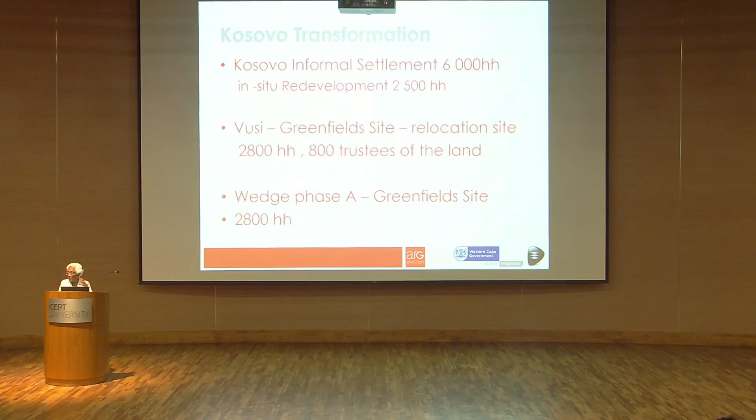Cape Town is at the bottom of Africa, and it's a peninsula into the ocean. We have the Indian Ocean currents coming on the one side and the Atlantic Ocean currents on the other side.

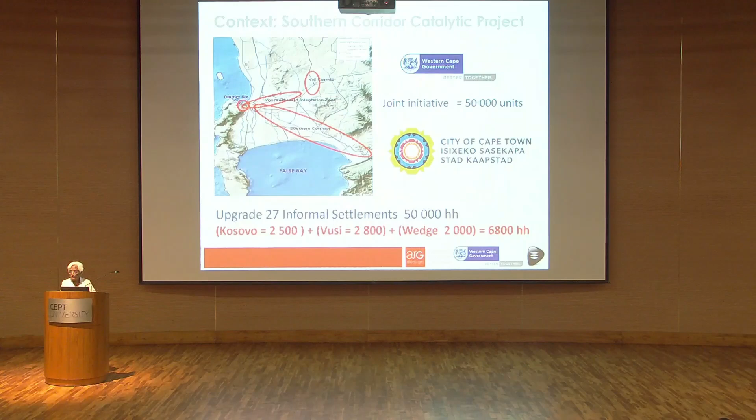After 1994, when we gained our independence, there was a massive rush of people who came back to the cities who had been forcibly removed from the cities. So we had a very rapid pace of urbanization, and there was not much preparation to receive the people who were coming back, rightfully coming back to the places they had been displaced from.

So Cape Town as a city is a polycentered city. This is the old city, Cape Town. Sorry, this point is a bit temperamental. The big circle, Cape Town CBD, is the original historical city settled in 1652.

Wynberg is another CBD, which is predominantly colored and Indian people. Khayelitsha is a CBD, which is African people, settled in the 80s, very rapidly built as a settlement for 1 million people. And next to it is a little tan colored kind of space as well, which is a space for colored people. And where it says Bellville is where the rich Afrikaans whites generally live.

So forgive me for the racial classifications, but it's very real in our city. And the way where people live and how they operate in the city is very much dictated by these racial backgrounds we come from. The red colored bits are indicating where the informal settlers have come and located, and it's largely along one of our national routes that goes through the city. They've chosen well because it gives them access to transport and the opportunity for access to work.

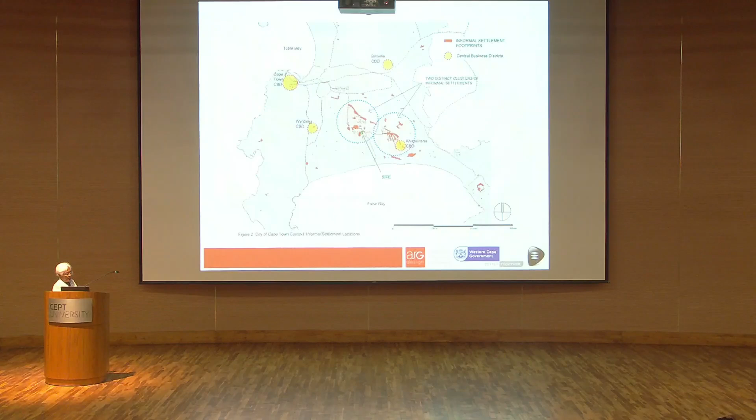Coming in closer, you see the mountains to the left, and Mitchell's Plain. There's Khayelitsha, home to 1 million people. The pink indicates the poorer suburbs.

This area used to be a sea in the old days, so it's got very loose sand and a very high water table. In winter, the water sits just below the surface. We have the highest tuberculosis rate in that part of the world, and the poorest are located there. It's very windy, very harsh.

We shouldn't have built there, but we have. The airport is in the middle of the city, and the red blob is called Philippi, one of the later settlements of the poor. People who arrived in Philippi have been forcibly removed up to 7 times before they got here. So the history of family breakdown, the difficulties of relocation, and constantly moving from fire to flood reflects the survival basis on which people live there.

The PHA is called the Philippi Horticultural Area. It's essentially a hydroponic medium above an aquifer, and it grows 60% of our vegetables, which gets transported 11 kilometers to the Epping market, to the richer areas, and then gets sent back. The food that people access in the pink areas, which we call a food desert, is thus deteriorated and very expensive.

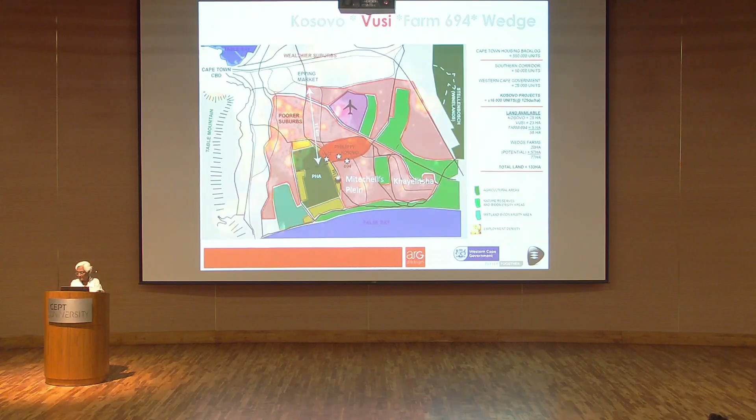This now is a closer look at the Kosovo informal settlement. The yellow area is what it is. The other bits of land you see are the bits of land we've been negotiating for the last 20 years, and now finally we're working only on the yellow bits.

In order to upgrade that land, this alternative site on the left, colored in pink, was found, and that is in the ownership of a community trust, which I will talk about briefly. The blue area I won't discuss in detail, but it's very conventional housing and also part of the project; we built 350 houses there.

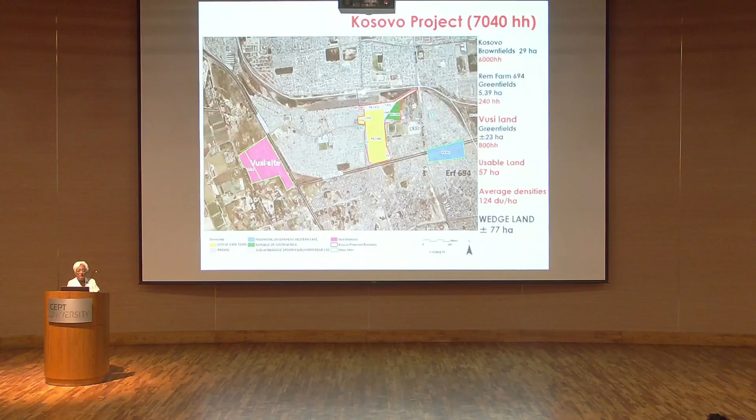To give you a sense of the grain of this part of the city, the areas in black were settled since 1993. For every starter house given, about 25 square meters, on a plot starting at 110 square meters down to 70 square meters, there are now between 3 and 5 shacks in the backyard. So even that is a ghetto.

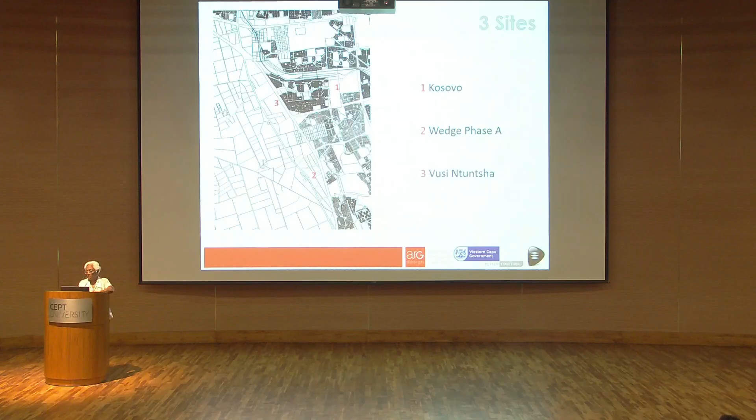So in looking at this project, I said to the province, please don't employ me and please don't pay me your fees. I don't want to earn more money from you for projects you don't build. You've got to find more land and more money because I don't like what you're doing. We've done 10 or 15 projects of this nature that you haven't built. So they gave us a bit of freedom to show them. I said, show me what money you have available to spend and I'll show you how to spend it. And they agreed to do that.

Benefit of getting older and having gray hairs, you can say things like that. So I really enjoy that. And that's what I mean by being a practitioner activist.

So what we did was we took the housing instruments. We have subsidized housing available to certain categories of people, 0 to 15,000 rands of income per month. We said we know that a strategy for most households is that once they acquire any kind of accommodation, they rent as much space as possible to help them earn some income.

If the housing is built well, it improves the asset value. That means they can raise bonds in order to do extensions and improvements. So optimizing the capex that the government is spending is very important. We've got to create decent settlements that increase the property values of where people are living, and people will very rapidly improve what they own within 3 to 5 years.

Livelihood strategies are important, again, in the heart of the jobless area. Can the settlement itself generate some work that helps support the OPEX, the operational costs of what they need to live with, so that they can afford to pay their rent, electricity, water bills, etc.

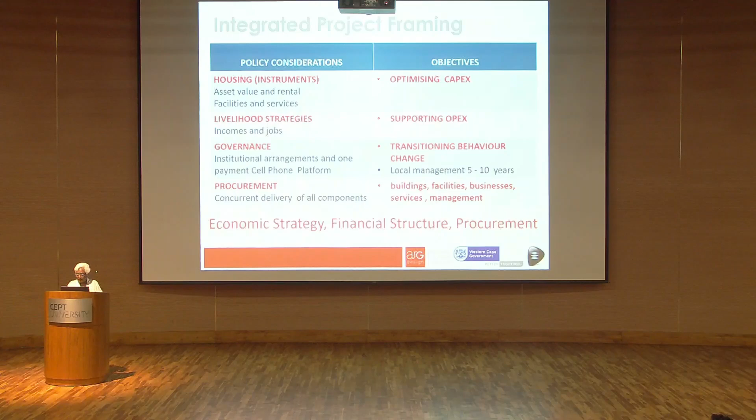Some of what I'm going to share with you is about saying yes, this was about designing a settlement, but actually we thought about every aspect of it to see how we could maximize the opportunity that the housing affords. These were summary snapshots we created so we could have 10 slides to share with the government. I'm going to share it with you in more detail, and if we run out of time, that's also okay.

This is to show you that we have brought to the upgrade of an informal settlement a city-making lens. We're saying that it doesn't matter if these people are poor, we must apply the same way of thinking to these areas that we apply elsewhere.

Some of the highest costs are your bulk and link infrastructure in order to go further and further out to the periphery. We said that 4 subsidies worth of funding can be allocated to the equivalent of 1 site, and then we can go up an extra story or create extra accommodation so that people can have rentable space, etc. And then on the roofs of all the buildings, we want to create rooftop farming.

Solar energy generation, have agri-hubs, water resilience, waste reuse, stimulate a local economy, and provide local goods and services. That in turn would reduce the livability costs and ensure that quite a lot of their costs were met.

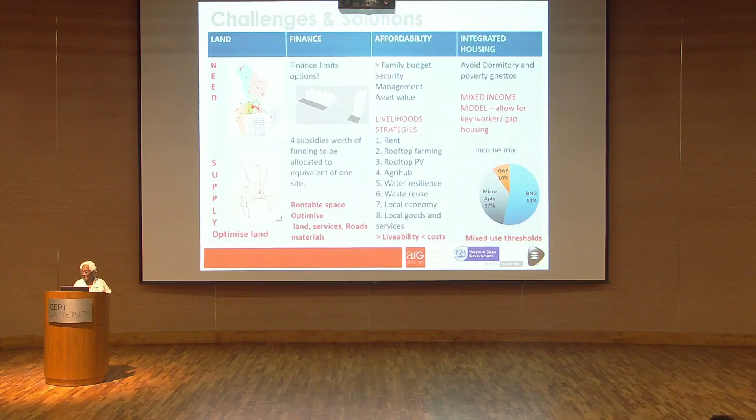But we've run out of land. So we said, okay, let's create shacks in the sky, but they will also get a shell which they will complete themselves. The gap housing is for blue-collar workers—nurses, doctors, teachers, etc.—who can afford housing. We said let's bring some of them in as well because it changes the actual flavor of the settlements, and often these are people who are linked into the community. So we try to address that spectrum of things, and that's what I'm going to be sharing with you.

Looking more closely at the grain of Kosovo, what you will see is the kind of major loops of roads which were carved into the informal settlement about 20 years ago.

A lot of the other routes are informal, and our city engineer had to walk with a stick and nudge the shacks out in order to create that opening and corridor so that people could access their shacks, but also so that emergency vehicles can get in.

We have winter rainfall with a very high water table, so every year there is flooding, and lots of people are sitting with water up to their knees. Particularly in summer we have extreme winds, and a lot of the folk that live here move between the rural areas and here. So a lot of the food they cook when they've run out of electricity is on open fires. So if it's a candle or a paraffin lamp that falls over, every year we have 500 to 1,000, 1,500 shacks burning down.

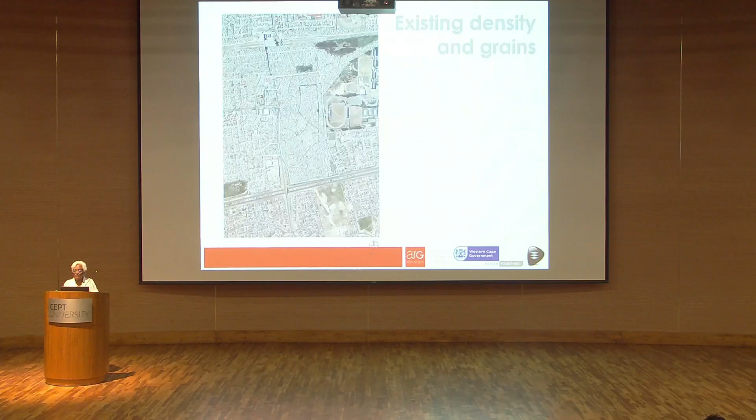So these routes become very important as evacuation zones. Typically what happens is that people throw their goods into the road in order to save them, and then you can't save the lives.

So we acknowledge that. We then also looked at the land assembly, and said, how does that work? If you look at the adjacent areas and all the assets in the surrounding areas, there are schools, meeting areas, a major stadium, and again we went to national government and said this is a stadium training the police academy, please will you move elsewhere and give this land to these communities, because there are no facilities for most of these communities.

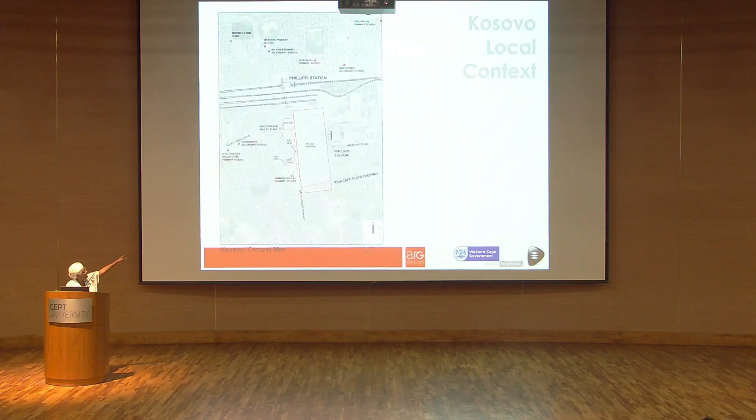Right next door to Kosovo is a formal settlement of 15,000 households. They're probably more like 30 to 45,000 households living in there. So there's a dire need for social and other facilities. On the right-hand side, where it says Philippi Stadium, is actually a colored area, and again there's disparities there, and you can see that the grain of the city looks different.

So to start this process, we came up with a block. What the city agreed with us is that we could restructure the way in which people are located into large urban blocks. The large urban blocks would then have a certain density, and to create those, we would create the roads, we would create the green areas, which is public open space.

The brown areas is where social facilities would be located. The blue areas is where detention ponds are located because the water table is very high. And everywhere that we then have roads and any of these facilities are shacks that we would have to take out of those spaces and relocate elsewhere.

So we computed that and we worked out where it would go. By the way, if you look up at the top is the railway line. This is the second most busy railway station in the city, but it doesn't look like that, it doesn't act like that.

What happened over COVID is that people were so desperate to try and de-densify that they went and squatted on the railway lines. So this is where the trains came and slept at night, and they can no longer do that. So part of that is also being cleared.

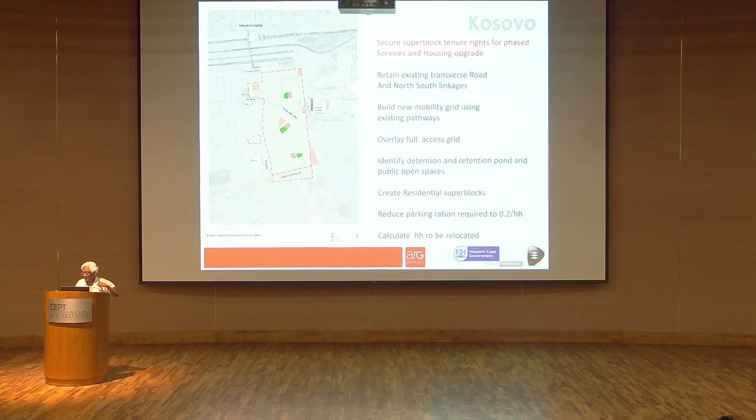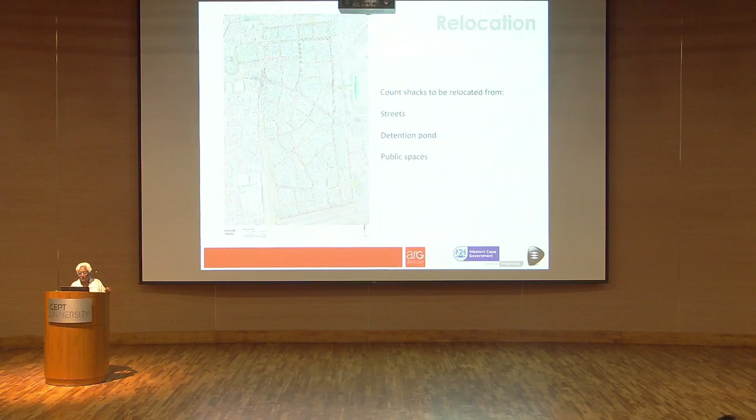So we are in a state of crisis with regard to our housing. Looking just at the urban blocks then, this is what would remain. We created an inventory of each block and the number of households that will remain. We took the other spaces and counted up the numbers. It's wonderful with ArchiCAD. As we put the dots on, it pops up the numbers automatically, so that's quite fantastic.

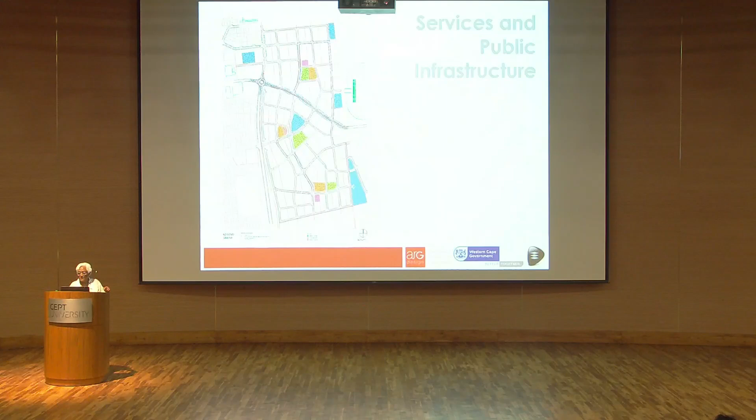And then we said what's important is to put in the green streets. There's something, because this land sits on an aquifer, called the managed aquifer recharge system. If you plant a whole lot of particular kinds of trees, like hybrid eucalyptus trees - and in our country eucalyptus trees are a no-no because they suck up too much water - in this instance we do want to suck up water in the winter because we want the water table to settle slightly lower than it is currently, which would help with the tuberculosis rate. However, the trees would also act as a windbreak, and it would also allow the ongoing recharge of the aquifer.

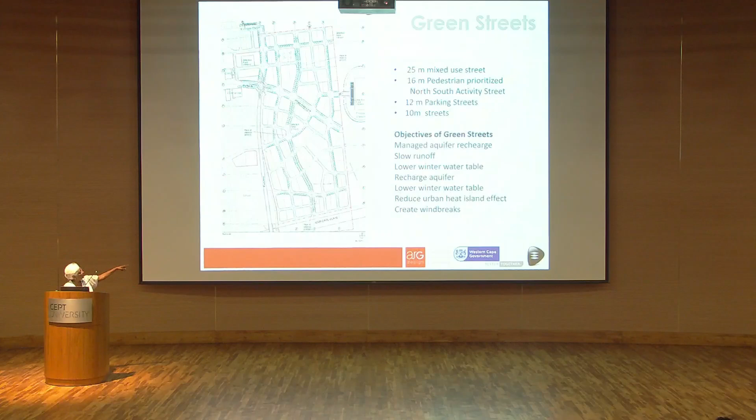So we did that, and the hierarchy of streets is informed by double avenues of trees, single avenues of trees, etc. You'll see that the central column of trees has a double avenue, and that's a pedestrian prioritized street because most people walk. The distance from one corner of the site to the other corner of the site is just over 1 kilometer, so it's very walkable.

Each block was then divided into two so that they could have 2 service points. Again, we inventoried that, and we also identified the hierarchy of the streets quite carefully. And in each block, the ratio of taps to households is 25, and the ratio of toilets to household is 5.

Right now in the existing city settlement, there are up to 40 households that share a toilet.

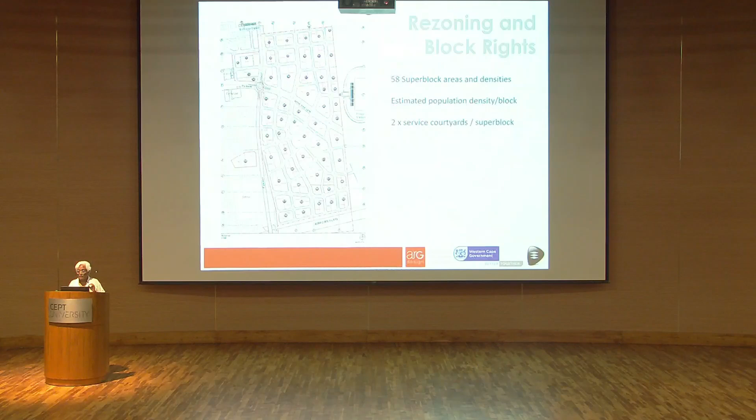I'm going to go fast because this is just showing the methodology of how we work through. When the whole plan comes together, this is what it looks like. Now we apply the urban design framing. This diagram came at the end after a lot of iterative work.

Back and forth between ourselves, the engineers, the urban designers, the planners, our clients, etc. Here we look at the creation of gateways so that each entry into the settlement is distinctive. There's a sense of identity, a hierarchy of routes. The wayfinding is interesting because when you arrive, you can see where things are happening.

That transverse corridor supports mixed use, so it's formal, 3 to 4 story housing, and the north-south is 16 meters. The brown loop road is where your emergency services, etc., can continue, because people are still going to continue living in shacks for quite a while.

The clustering of the public and social spaces becomes quite important, and they're linked by the pedestrian route so people can walk up and down the site in a safe fashion.

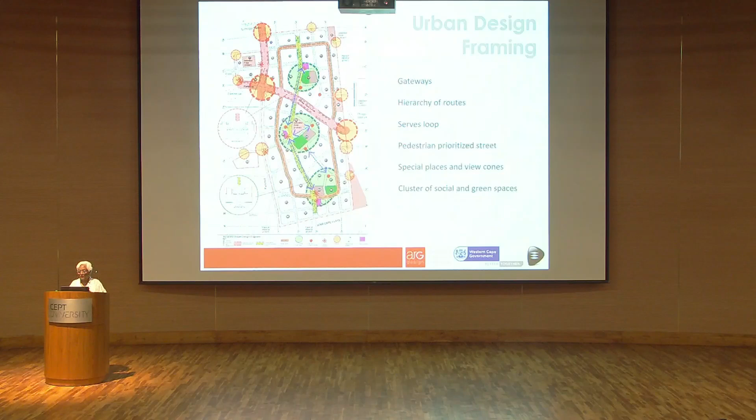So here you see the gateways, the economic web. This is the dominant economic web, but of course also where you have the clustering of social spaces is where quite a lot of activity around the shops, etc., will happen.

We have what we call the spaza shops, where people will operate out of their front room and sell food and vegetables and beer and all sorts of things like that.

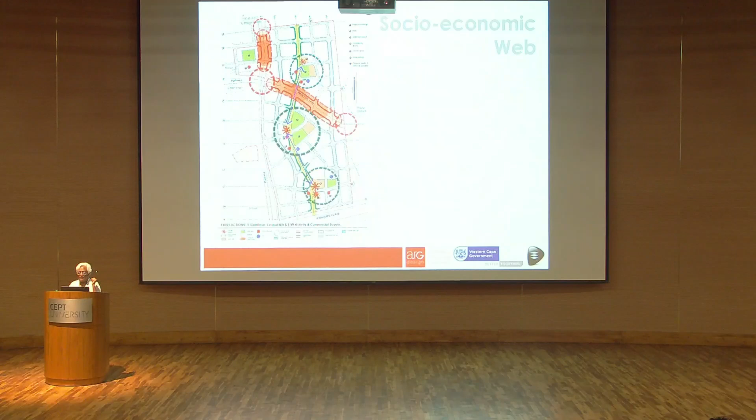This is the socioeconomic web then applied to it, which becomes quite extensive. Services and emergency routes, mixed use and informal trading streets. And now you have the housing super blocks with their service points.

What this means is we've said to the city up front: over-design your service routes. What we have found is that settlements designed for 3,000 households end up having 15 to 20,000 households. Every day the water works, the sewage works, the electricity works are popping, bursting apart because there's too much overload.

So we said anticipate the overload. It's going to happen here as well. If this is a site on the edge of a station, anticipate that your density is going to be beyond imaginable and allow for that.

So they start off by just putting in the bulk services, which is the marginal extra cost to what they would put in anyway. What that allows is each super block has the opportunity to be developed in a different way. There are financial and other mechanisms being worked on that would allow for a whole variety of development options to come about, because there's common tenure owned by a bunch of people.

A very simple version on one of the super blocks of tenure is that you create simple row housing, 10 meters by 4.5 meters wide, such that the roofscape is continuous, such that the roofscape actually becomes an energy generator. Our city has now just invented independent power generation regulations, so they can be a business that puts surplus energy back into the grid after satisfying their needs.

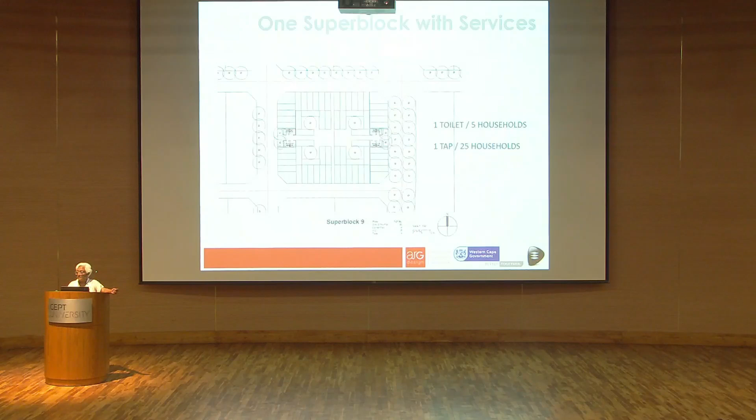Then the future development options allow them to develop single row housing, perimeter blocks, duplexes, and the type of zoning we've chosen allows mixed use anywhere and to go up to 4 and 5 stories maximum on a walk-up basis.

90% coverage, and we motivated for a reduction in parking, with parking allowed in the street. The front boundary setback is 0 meters, and they need a setback on the back boundary for breathability. So the sizing and shape of the sites were carefully considered as well.

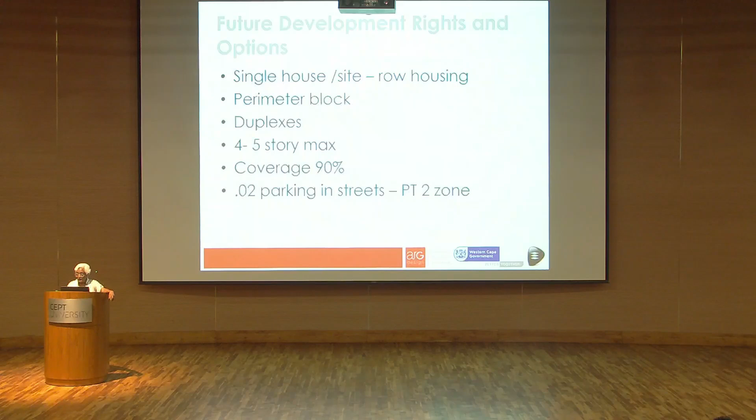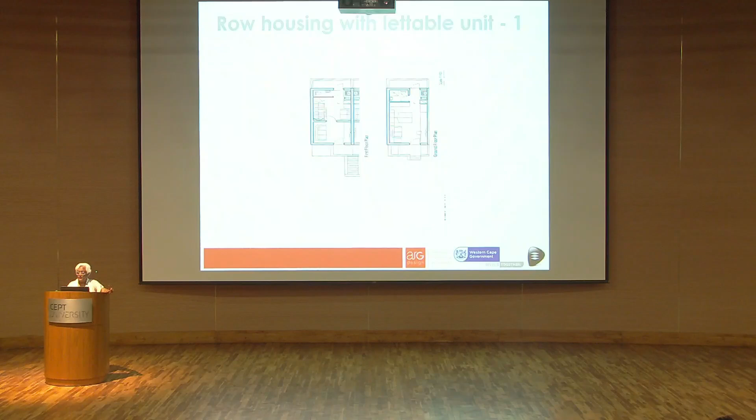This now shows a little of what the row housing could look like. Again, with an external staircase, you can have a flatlet at the bottom that you rent, and then upstairs you get the opportunity for a double-story construction.

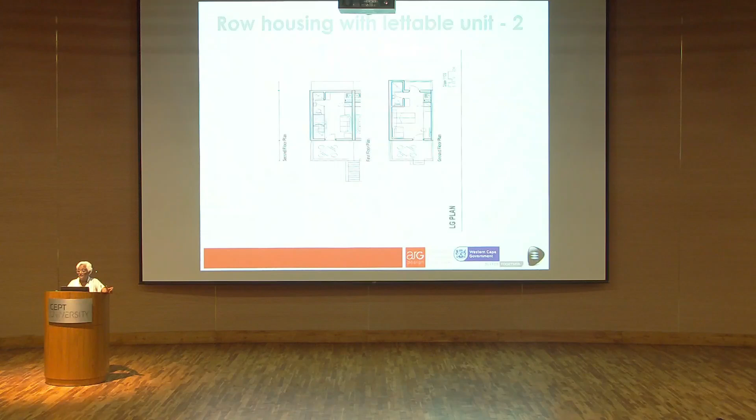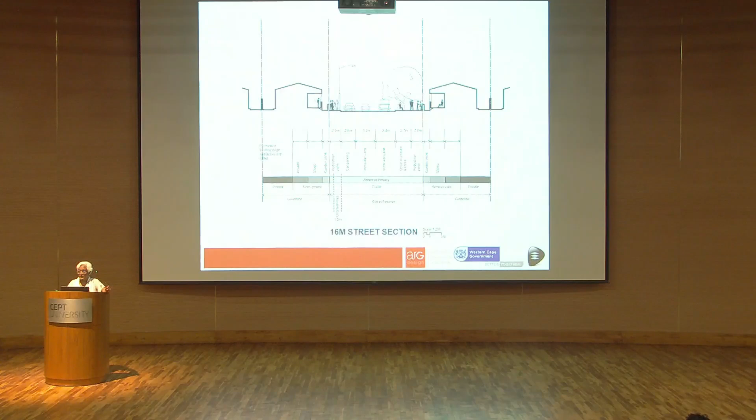And this is also for breathability and safety, because until they get to this point, they're sitting within shacks, which still requires the evacuation requirements. This is pixelated, I apologize.

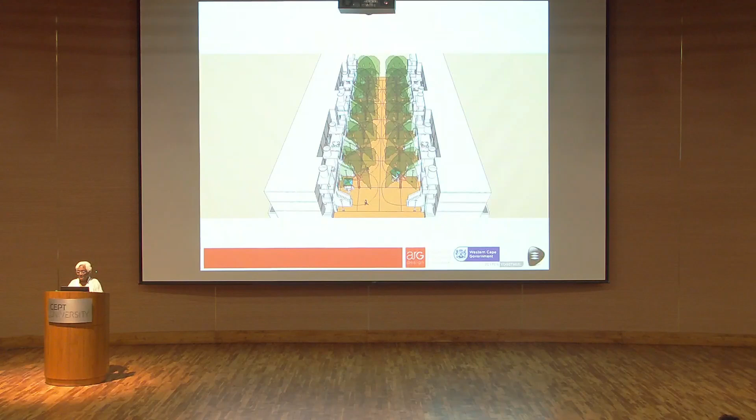So that is the first part, and these are just some visuals of what that looks like. There are many, many visuals. We're working in collaboration with a bunch of teams, and some of this work comes from other teams. This shows you the many different ways in which they can develop this: 4-story housing, or 5-story housing.

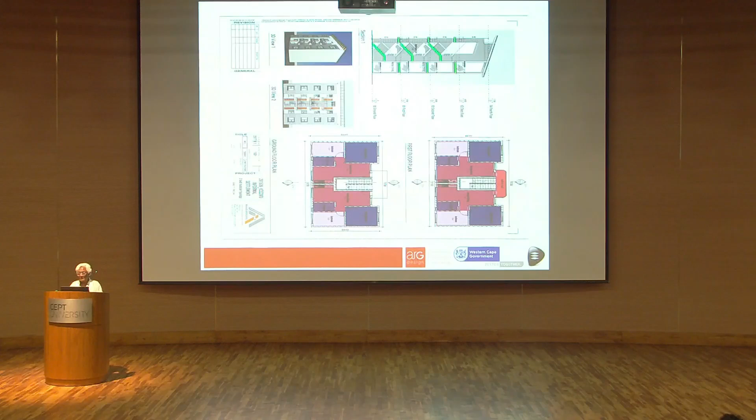This was a project we built very quickly as an example for the city. Within a month, we took people who were living in shacks, 10 units on a 10 by 40 square meter site. They went and found accommodation in the surrounding areas, then came back and built the shell with 10 units. In 30 days, the city then came in afterwards and put in the services.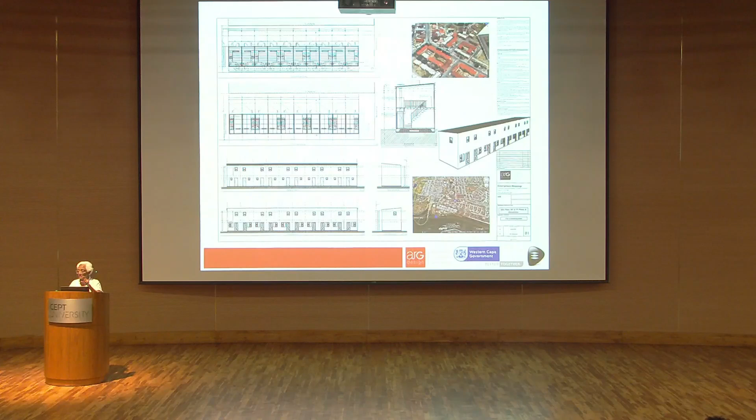We're not going to win any prizes for this, but I'm very happy that it's provided very good roofs over people's heads. Although the site is 10 by 4.5, it allows for a double-story extension to the front, which allows a lot of self-expression and identity creation in the way the front is developed.

Perimeter blocks can provide 25 square meters within which, designed carefully, a 4-person family can live very easily, with a curtain separating a double bed and then bunk beds, and then washing and servicing happening on the ends. So these are some of the examples, and I can share clearer examples with you.

Now I'm going to go to the wedge and show you the second site that we worked on. How much time do I have? Can somebody tell me, please?

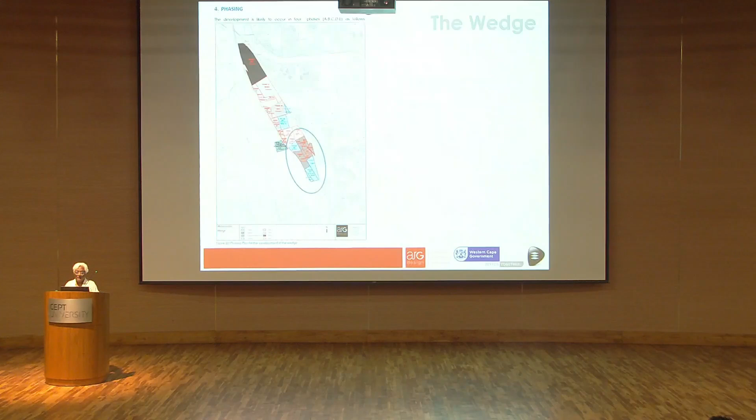30 minutes, perfect. So this site used to be agriculturally zoned. It's made up of a number of different sites that used to be owned by different owners.

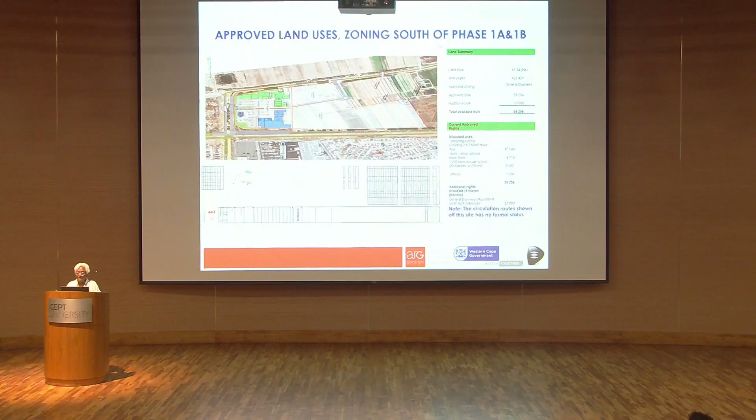What you see in green and blue is a site that's going to be developed by a private developer with a very big shopping center and maybe a school or a clinic. They will probably put a boundary up and not allow poorer people to access that.

So again, we looked at those sites and said, let's apply some design and development principles. It's important that we have east-west connectivity into the site, that the access routes are clear. They're also determined by the city, which doesn't want too many entry points into these settlements because they share a boundary with the Philippi horticultural area.

We have to create a transport and mixed-use hub. The green zone with the little red asterisks is where the transport hub will be created. This represents one village of a number of village clusters that will happen further north.

There's a hierarchy of places and spaces defined in the settlement, and particularly each block is structured as a neighborhood, as a walkable neighborhood. There are views and landmarks, and a hierarchy of living streets. Living streets are where we encourage people to spill out, play soccer, the kids can play, grannies can sit out like that, and there's housing and funding eligibility.

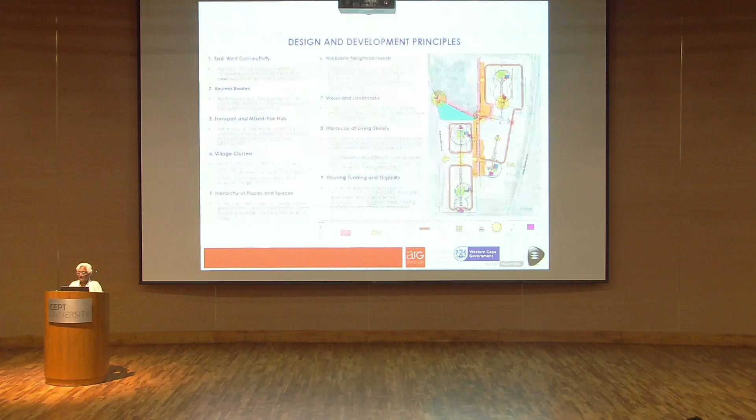Again, the kinds of instruments available at housing level include subsidized housing, and in this instance, something called small-scale developer plots. What our government has discovered is that in our informal settlements, where some people have managed to assemble a little bit of money or syndicate the money, they take a couple of sites together and develop it. That allows them to build 2-3 story multiple housing where a family lives in one room. It's not uncommon in many parts of India. I saw this before and I'm sure it still prevails.

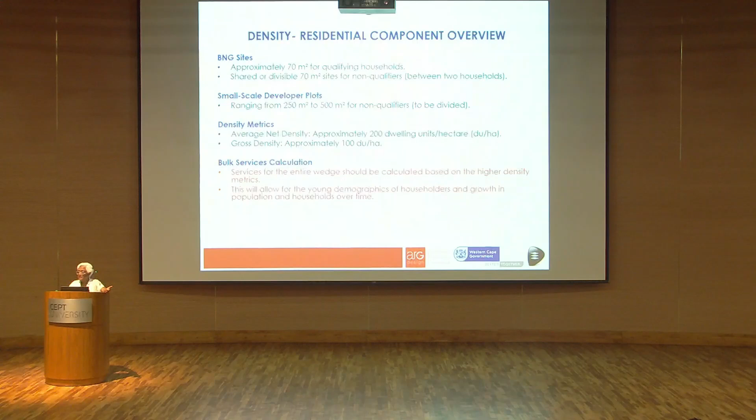The density metrics here is that we're looking at 200 dwelling units per hectare on 3 to 4 story construction. Again, the footprint we have to work with is what the government's policy allows, which is single and double story footprint. But we've said to the city, please use the zoning to size the services to anticipate a future growth where there's going to be probably a doubling of the density. We had to work very hard to assemble the site.

There's always contestation between provincial government and the city of Cape Town. Our client is the provincial government. So if you see that little triangle corner of site, the city said we're not giving that to you, it's useful to them. And I said, okay fine, we'll design around it. And right now my office is redesigning it. I'm known to go and rattle the cages of everybody up to the top, to the mayor and the premier.

I will not rest till we get that piece of land. And then we had to just think sensibly about all the boundaries. Just above us is an informal settlement where the private owner actually allowed all the sand to be mined away. The sand in this part of the world is very good for construction purposes. And then he allowed the squatters to come. The squatters are sitting in a swimming pool, every winter they're in water. So the minute we start with the site, we know that that community is going to come and protest, and we're going to have to deal with that.

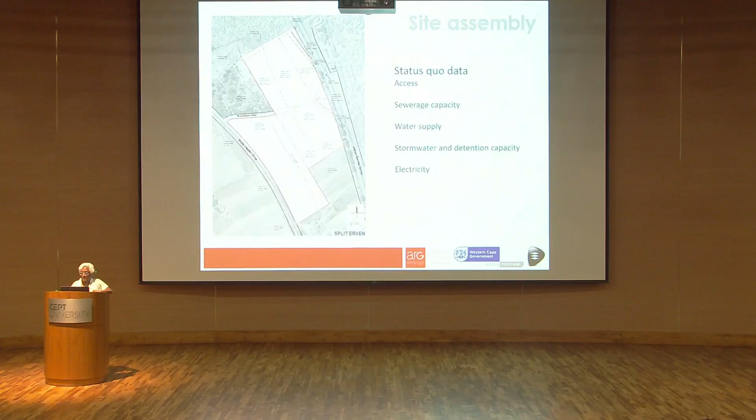We've parked that problem for the moment because there are other sites being developed as well, but it's important that we use the site very well. Again, we've taken the notion of gateways, landmarks, edges. Some of the lines have not printed through correctly, so I apologize, but the final drawing brings it all together.

There are mixed-use zones. Now the orange zones that you see, the deep orange zones, that is where the micro-developers can come. We now have the financial mechanisms that allow them to raise the capital, so they can create shopping at the bottom, leave some space for informal trading, and then create residential above that. It's a win-win because they then become landowners, so it's developing small-scale landowners, and the sites are all subdivided, so they can do 2 or 3 sites at a time, or they can take up the whole piece.

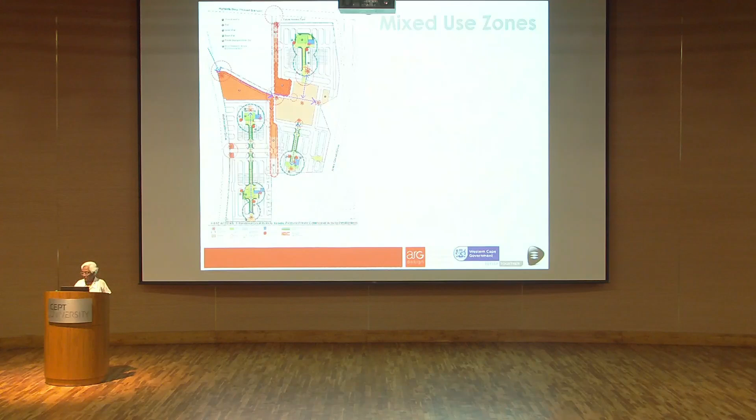And then internally, what we've got is, again, a perimeter core with higher formal housing, and then inside of it, service sites where the sites are very, very small. The services and emergency routes hug the inner core to allow for fire and emergency vehicles to be able to run through, and also the waste trucks, etc.

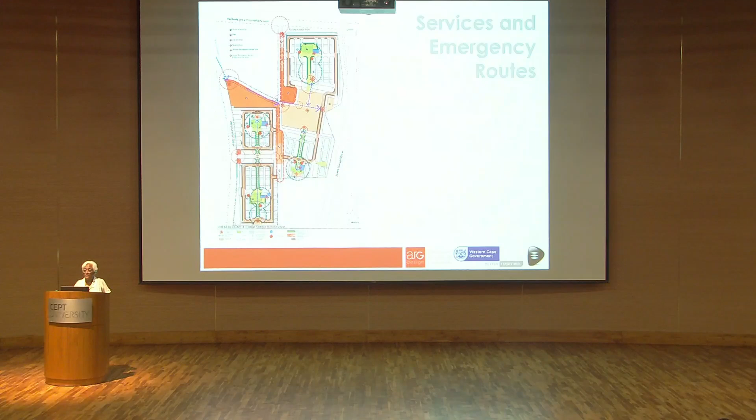And then we've got the street typologies with the hierarchy of wider streets and narrower streets. Apologies, the image quality is not that fantastic. And then we have the internal pedestrian prioritized streets so that children could walk to the early childcare centers. In this instance, the tan irregular site in the middle is the primary school. It is large enough to carry a vertical primary and high school with shared facilities.

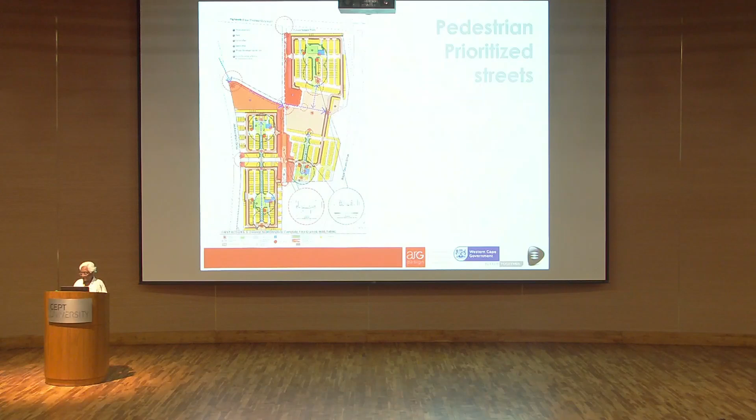We're negotiating that with our government. They tend to be rigid, the education department tends to be rigid about what they'll allow and won't allow. You can see here we had left out the triangle, and just in the last week we've now been given permission to incorporate that triangle.

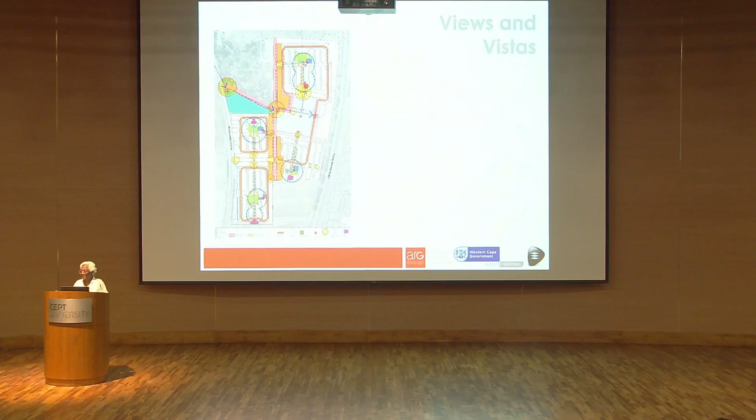We work with the notion of views and vistas. So again, if you can't afford to put money into everything, we know that the churches will create something really beautiful, and we put the parks adjacent to those. So those are the kinds of places where the community activities go. We have a very religious community with lots of gatherings every day. And right across the way from the park is where all the taverns will be, so all the drinking happens there. But it means that the children can be looked after at the park as well.

And so this is now where the whole diagram comes together. You can see the bigger sites on the periphery, the smaller sites in the middle, the pedestrian zones, again with the notion of managed aquifer recharge with the green zones that we create. The other streets also have trees, this diagram just has not captured that. And in the legend here, you'll see on the central axis, number 1 is the church or the community center.

The blue blob is the early childcare facility. We have some of the highest rates of child abuse in the country, if not in parts of the world. It's a function of the breakdown of our families through generations of very harsh conditions, where 80% of the population was forced out of the city, sent to 20% of the land. Then the men were brought back on a pass system to work in the city, and that broke down the family system. And so there's a lot of trauma in these societies.

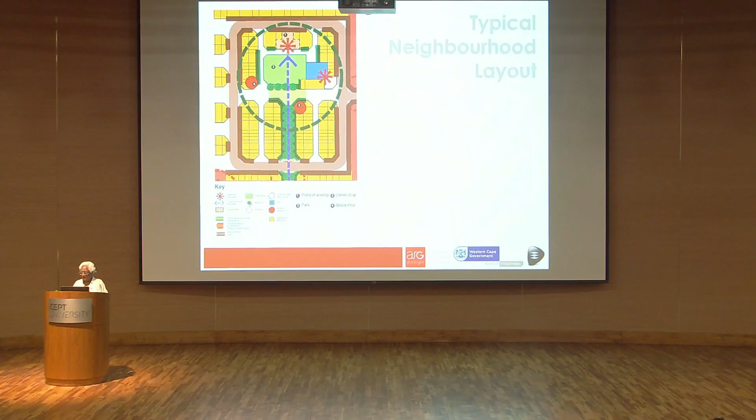And then the green is the park, and then the corner sites have the opportunity to respond in many different ways. These are suggestions. It stops nobody from being able to start a shop or a work from home kind of setup from their homes.

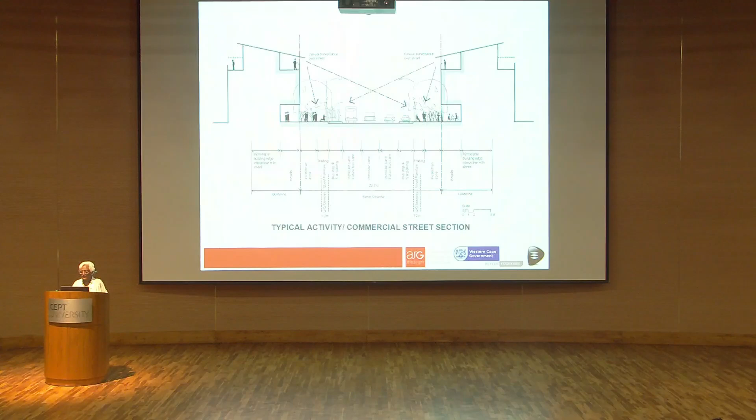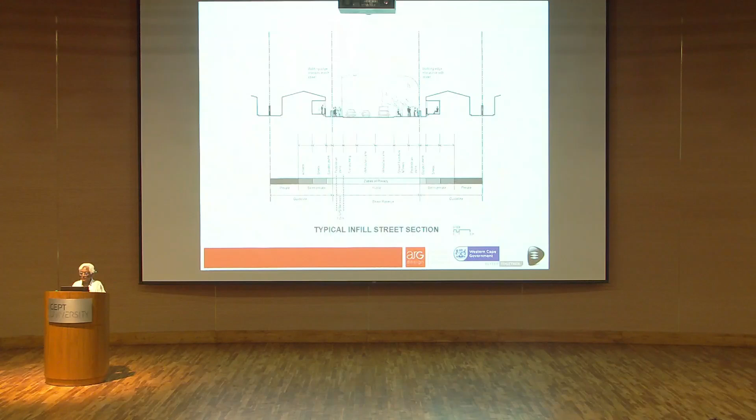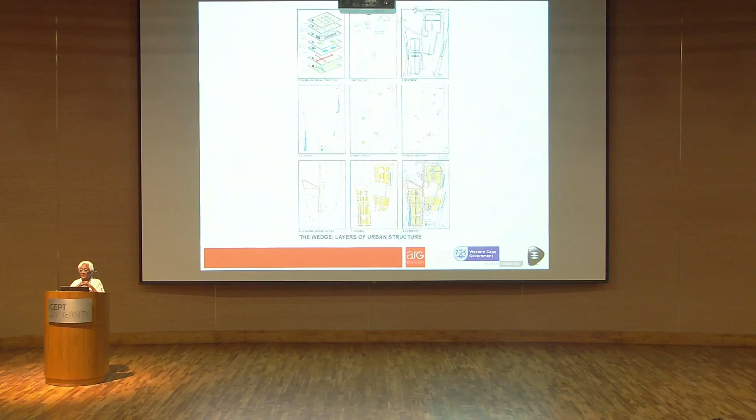Again, the street sections clearly designate from the city's perspective how things will work. Of course, most people don't follow all the rules, but we've designed the streets so they can operate fairly safely. This is how the whole pattern comes together: the land assembly, the services, the detention ponds, the basic public facilities and amenities, the housing blocks, and then the rest of it completed.

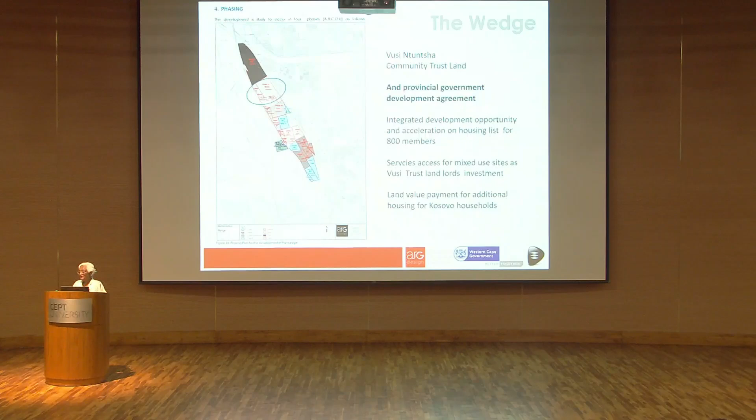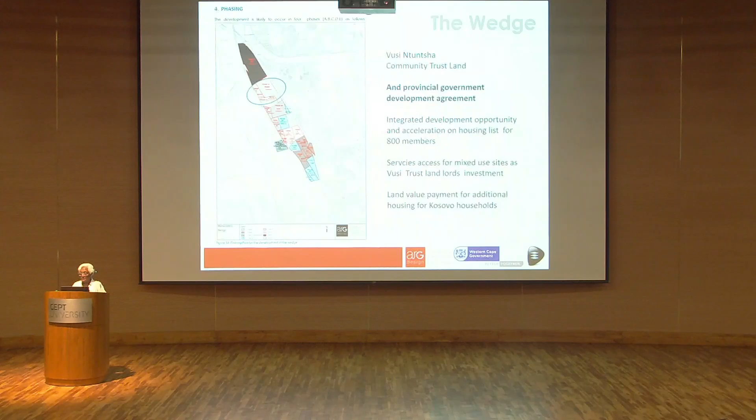So that was the second project. Now the third project is extremely interesting, but I've had to tone some of my ambitions down, though I'm going to share this with you anyway. This land belongs to a private trust. They agreed to bring it together with the government because the trustees, of which there are 800, would get accelerated on the housing list. It's a piece of land that already has quite a lot of investment on it.

The square with the grey buildings is a bunch of very large sheds. They do timber recycling, timber planing, and supply the timber industry. Those sheds can be used to harvest food from the horticultural area, bring it here, and create a depot for food, with wholesaling, so that this entire wedge tract of land, which is 100 hectares, will ultimately have about 30,000 households. This will be their shopping area.

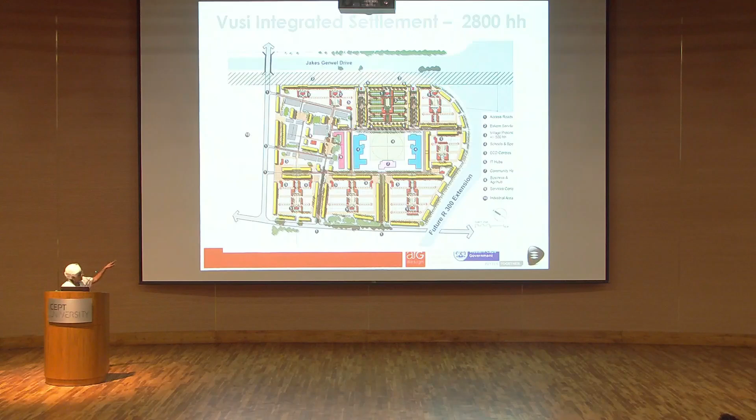Inside of it, we've created the blue zones, which are schools. Each neighborhood is about 500 to 700 households, and again it has a particular pattern along which it's been designed—a very clear hierarchy of streets that give you access, but then create internally visually protected zones, not gated communities. The yellow bands are 4 to 5 story structures, which is for the government project.

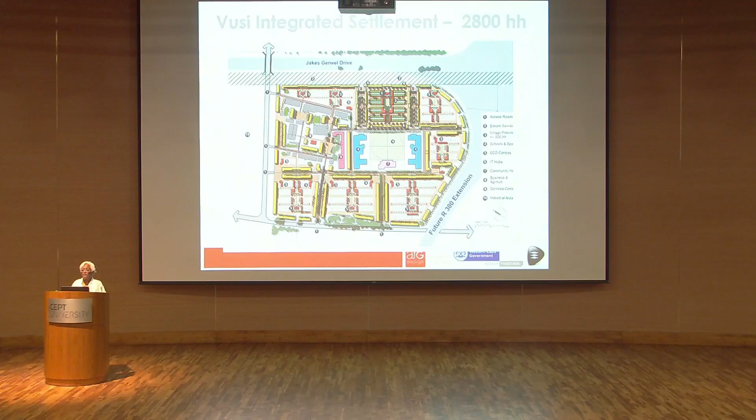The white sites in the middle belong to the community trust members, and they will have 2 to 3 stories. This entire project is structured so the roofscape can basically provide a proper business: a 5-hectare PV generation and photovoltaic energy generation business, and grow foods on the rooftops.

The red zones are where we encourage 3 and 4 story construction, where all the activity can spill out into the central zone, which becomes a community zone. The white streets are play streets, so you can park a car on the edge or in the streets, and the tan colored streets actually allow you to drive through. Between the blocks are parking courtyards, but during the day they are empty, so they're also where children can play.

Again, an emphasis on lots of trees. We live in a very arid part of the world—we get some of the least rainfall in the country, but in summer it gets very hot. In the climate change scenario, we're looking at a 3 to 5 degree increase in temperatures in the next few years, so the urban heat island effect is very real, and groundwater recharge is very, very real.

Again applying the city-making principles: access gateways, a network of public spaces. The green zone at the top is an Eskom electricity servitude. Within each neighborhood block, on the corners, we've recessed the spaces and created early childcare facilities and public spaces with playgrounds, and those become the collection points where people can bring their organic waste. Our city is creating legislation where you will not be allowed to put your organic waste into the garbage.

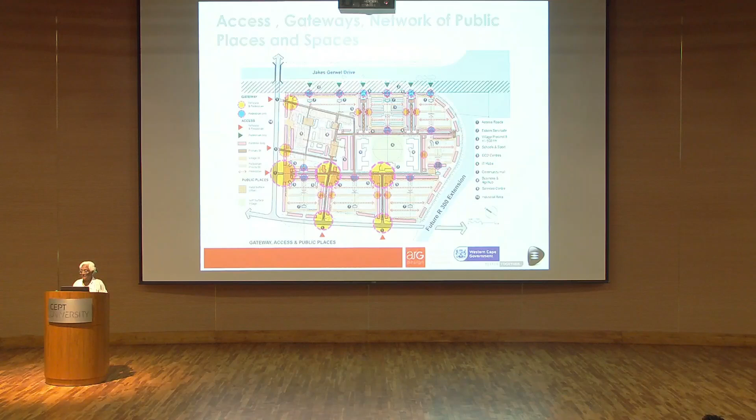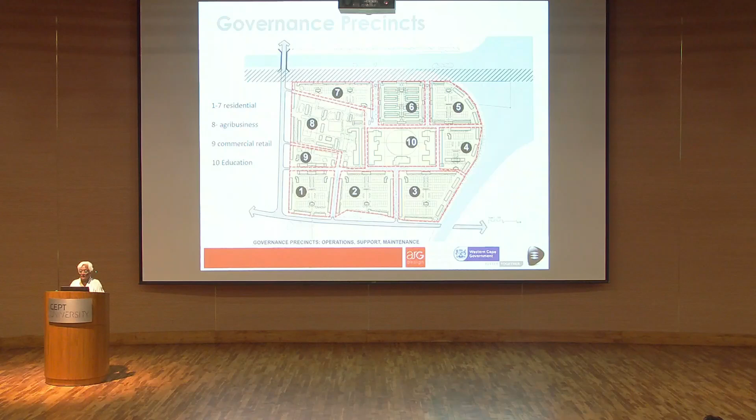So you've got to try to compost it and retain the nutrients on site. That gets collected and taken to the electricity servitude, where you're allowed to compost it, and that becomes the nurseries for generating some of the seedlings, which then go to the rooftops and get grown. Each neighborhood becomes a business entity and a management unit: we have 1 to 7 residential, 8 is an agribusiness hub, 9 is a commercial hub, and 10 is the educational facility.

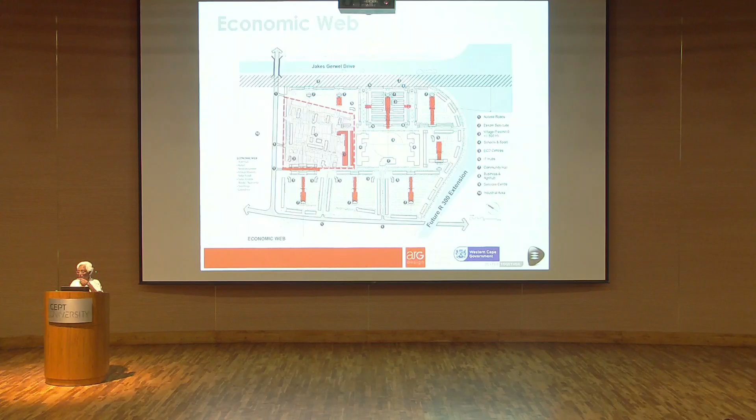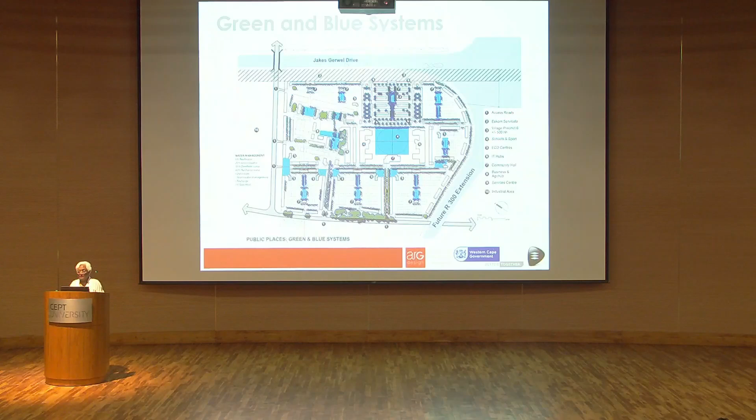The economic webs are localized inside the neighborhood area, so there's a consciousness that what you spend in your neighborhood goes into the pockets of your neighbors, and things you can't get there you get further out. These are the green and blue systems—instead of giving up a whole lot of land to detention ponds, we've acknowledged that some of these central spaces may flood for a few weeks during extreme rain, but the percolation allows that to dry out very rapidly.

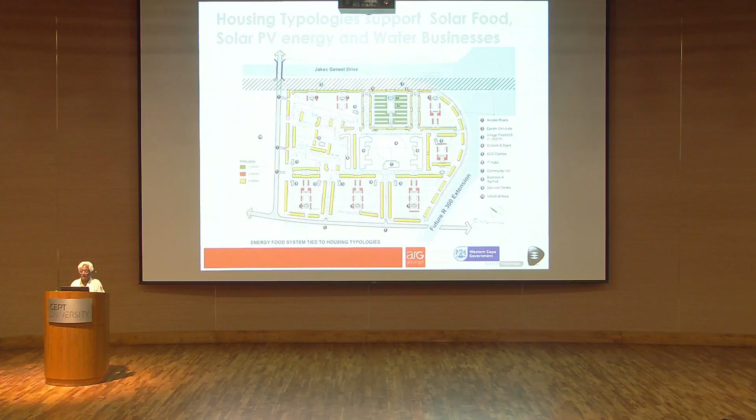The green is where we have the 2 to 3 story housing, and the tan color is where we have the 4-story housing. So what we then have are the collection points, and the collection points are also what drives the behavior change.

So when you drop off your things, you get a token, a cell phone token. So it's one cell phone payment system. The corners of the tall buildings have Wi-Fi free zones.

You can go and log in and do an exercise which teaches you a whole lot of skills about urban management, about energy saving, etc.

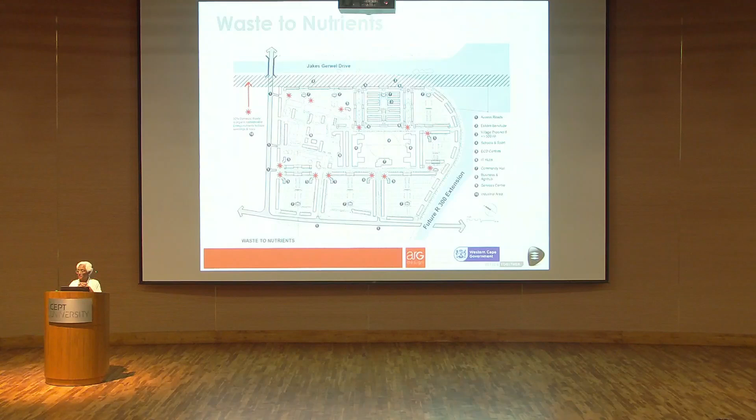You can log in your data around the performance of your household, and you get incentives as a result of that. This was a global workshop that we created with people doing energy generation projects in other parts of the continent, and these were some of their suggestions, set up on a business basis.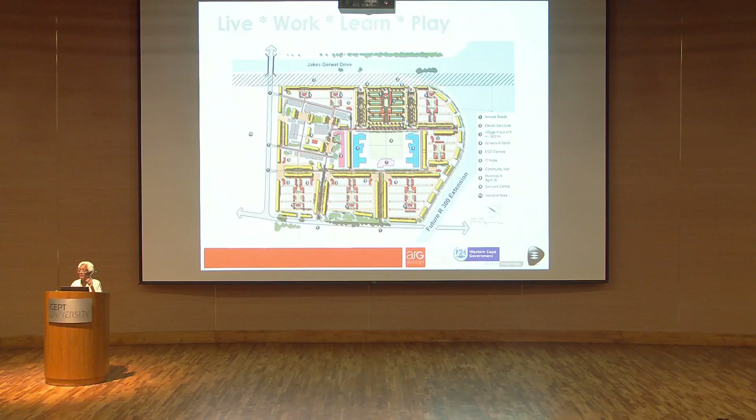So here then you have 2,800 households that can live, work, and play in this neighborhood, where typically it would just be a ghetto. This is the format of the housing.

This is not architecture. So the people who own the housing can actually get their housing, which is 40 square meters, and the slot in the middle can grow into their middle class house of 80 square meters.

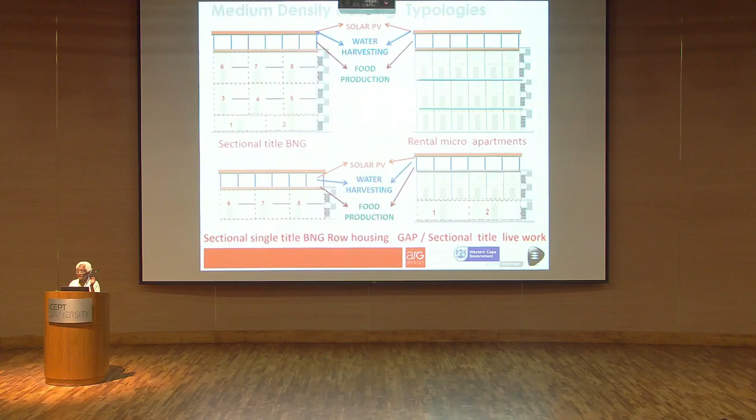But until they get there, they can fill that in and pre-fund it. And the pre-funding allows them to then have tenants in the middle. The one to the right is the rental micro apartments, the shacks in the sky, and the ones at the bottom are the private housing.

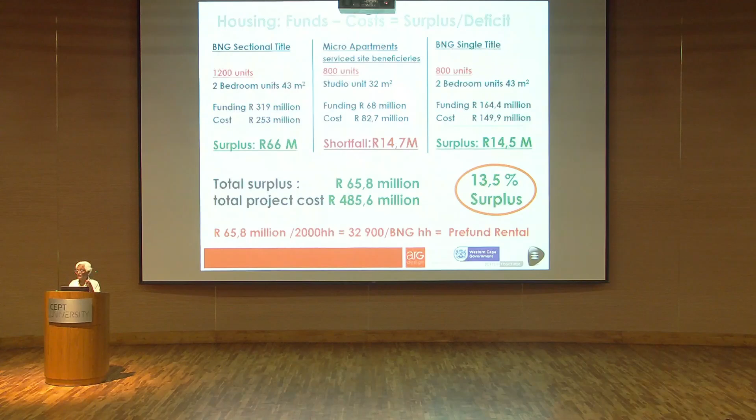And the income - all members are part of the solar energy business and the food business. They get a monthly allowance from that as their dividend, which allows them to pay for the costs.

And these are just some of the details of the rooftop energy, 5 hectares. We can manage the water because the laundries are all based at the top, so all the water coming out as grey water is recycled and can be used for laundry and toilet flushing. We factored in the cost of the reticulation.

So instead of 50 litres per person per household, which is an unsafe consumption level in a poor community with a high disease vector, we've increased it to 75 litres.

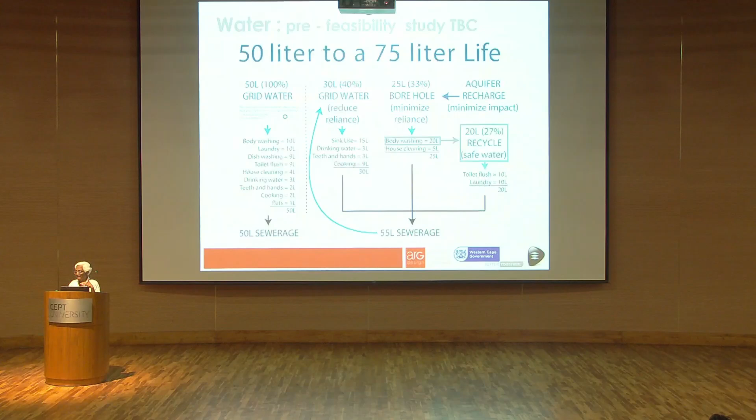They're still under the prepaid free limit that they can access, and the demand on the grid is reduced. We show there's a profit share of 1,300 rands per household, which allows the children to be fed better and for them to pay for medicinal uses as well.

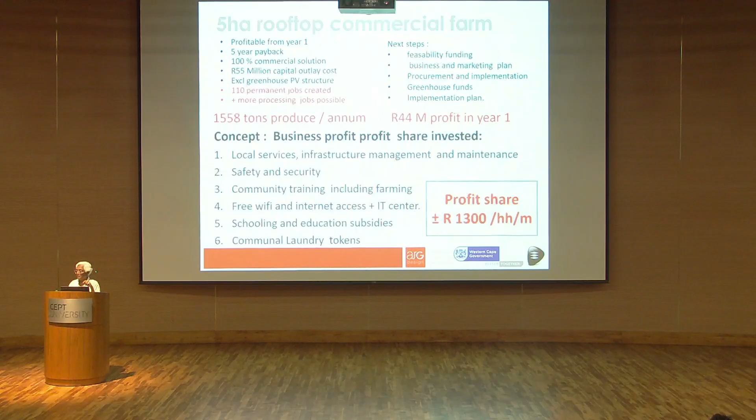And the hub then provides goods and services for 9,000 to double that number of people. We've approached our local university, which has set up a governance school to train people in order to create that governance unit at the neighborhood level.

So you'll notice that in each of our projects, we're trying to work with either the urban block or the governance unit so that we can rethink the financial architecture, the actual architecture, the income generation architecture, and then the actual format of the housing itself.

The housing is a machine for living. I will end there. Thank you very much.

I know it's a lot of information, and the work that we do only comes together after many years of working. I saw some of your foundation work, and every bit you're doing around understanding the ergonomics, the size of things, etc., factors into this, because this is very, very tight design. So there's no question that's stupid in my book, and all questions allowed.

Ma'am, in all the plans you make the zoning very strict. So why not make it less strict? Instead of 4-story houses, you make it high density residential or low density residential.

We chose 4-story housing - well, it's not 4-story, it's 4 or 5 stories. It's a height restriction. We have to put a zoning in when we apply for the rights because the infrastructure is calculated on the base of that density. And our city isn't in a position, and the actual financials of building above something that is a walk-up pushes it out of cost at the moment.

But that's a very good question, and certainly in my book, we should be going much higher. But that's part of the negotiation, and that's where we managed to at least push it from 2-story to about 4 to 5-story. One more thing - everything is government constructed in the plans you make there.

We're working on other projects where we take government land, package it, de-risk it, and secure the development rights, then it's developed and delivered by private developers. In this instance, the government will put it out for procurement, but it will be built by private sector construction agencies—that's just their pattern. We haven't been able to break their pattern. But right now, because of the 3 components of this project, they're busy rethinking, and we're part of that discussion to see if it could actually be procured differently. So our appointment ends at the end of the stage, and that gives them a chance to rethink how they're going to procure it. Thank you.

Anybody else? I'm sorry that it's not beautiful architecture yet. Go ahead. Okay.

How difficult is it to convince the government of your projects and procure that land?

Thank you very much. I hope I haven't scared you. This is wonderful work. There's a very large part of the population globally that needs this kind of input, so I welcome you. It's a lot of fun, a lot of creativity, and I think with where you guys are going with AI and the technologies, it's a brave new world coming up. So I wish you all very well with your studies, and the girls definitely don't give up. Hang in there and fight the good fight. It's important.